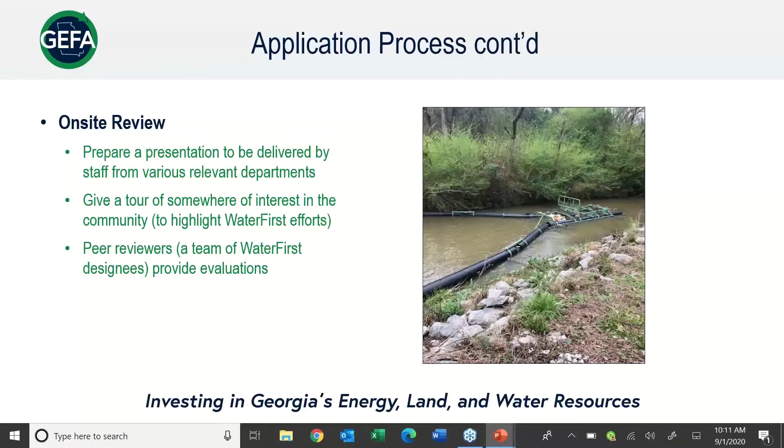The first is the watershed assessment. Then you have water conservation, water reclamation and reuse, stormwater master planning, water supply protection, education outreach, wastewater treatment and management, water supply planning, and regional water planning.

All of these criteria are actually on the checklist, as Ansley stated previously, and they're broken down so that each community, when going through their checklist, can determine what areas they are proficient in and write down any information they need to add that would be beneficial for the reviewers, so they can see exactly what the community is doing within these 9 components of WaterFirst.

So this is something that, when we get an opportunity to review, gives us the chance to see what the communities are doing with WaterFirst.

This is one of the big aspects of WaterFirst: the incentives for why communities want to be WaterFirst. The first incentive is a 1% interest reduction for GEFA water-related loans. So anytime you are designated as a WaterFirst community, when you apply for a loan from GEFA, you get a 1% interest rate reduction, which is a huge cost saving for the community.

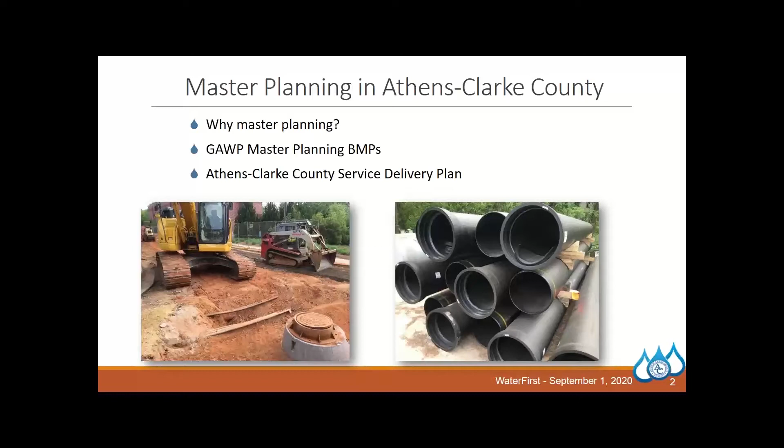My goal is to provide some useful tips that you can try out. I'm going to talk about the reasons a utility might want to do a master plan, and I'll share some helpful resources. I'll use our plan in Athens to highlight the things that I think are important. And of course, I'd be remiss if I didn't tell you a little bit about my utility.

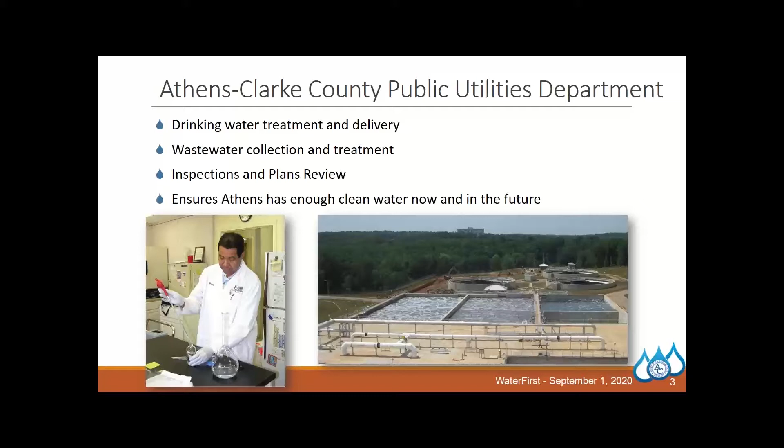We treat and deliver about 15 million gallons of water every day to about 125,000 people, and we collect and treat about 10 million gallons of wastewater every day. We serve all industrial and commercial customers and about 75% of our residents. We review plans and inspect all water and wastewater projects, and we conduct thousands of water quality tests every year to make sure that Athens has enough water now and into the future.

Before I dive into our planning process, let's take a quick poll. What is your level of understanding of master planning? Are you completely green, have some basic knowledge, some solid background, or are you an expert?

I can't see the poll results, so Ansley, you're going to have to tell me what the answers are. So far we still have some answers coming in, but we have about 40% saying they have some basic knowledge, about 29% are completely green, 29% have solid background, and 0% have claimed to be an expert. Well, I can't claim to be an expert either, I'm just good at some bits of it. And just to remind the audience, you're actually clicking the right button for the response on the poll.

All right, well good, we have people with some basic knowledge, some solid background, and some newbies. I think my presentation will probably have benefits to everybody.

I sure hope so. But there are a lot of reasons to do master planning. Maybe you started an asset management program to improve facility operations and some big capital needs were identified. Or maybe you've started to notice increasing problems with sewer overflows and water main breaks. Operational challenges like this can be a signal that you need to engage in master planning.

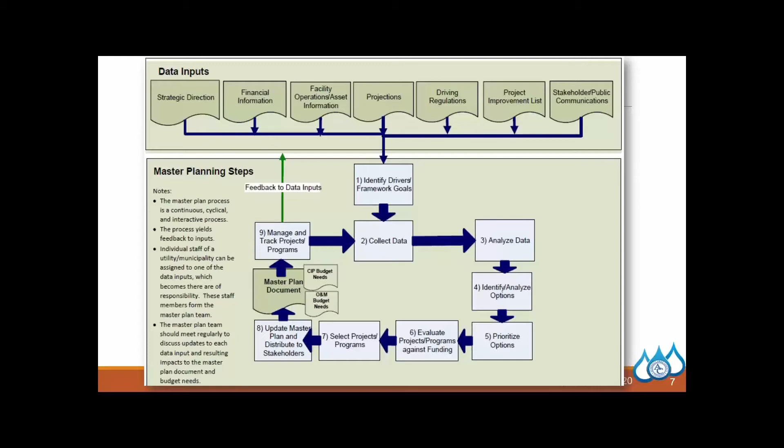So this is a page from those guidelines. You see the data inputs at the top and how they feed into the master planning process. Our process in Athens is very similar to this, but this one looks very complicated. So we simplified ours to just the major points, and we used our simplified diagram to help us explain our master planning process to our customers, elected officials, manager, and really anybody else who's interested.

It has been an extremely valuable tool in getting our work done. It's a 20-year plan that's updated every 5 years, and every 5 years when the mayor and commission accept the plan, they also accept 6 years of rate changes that support the plan. Although every year along with the budget they have to approve these rate changes, so they approve them annually, there are no surprises and they tend to go pretty smoothly.

Our broad overall process is pretty simple. In every update, we review our goals and objectives for water and wastewater service. In the infrastructure element, we assess the existing water and wastewater system and identify a list of projects to help us reach our goals. Then in the capital improvements element, we prioritize the projects, and in the financial element, that's when we actually schedule them over the next 20 years.

I'm going to focus on performance measures for a moment. We use them for so many things, I think it's important to highlight them. They provide us with the detailed goals for each of our services.

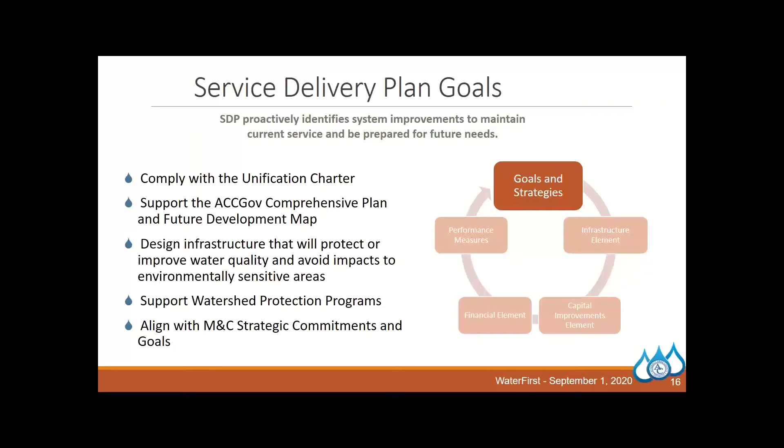For example, we did an economic analysis of water supply shortages, and that helped demonstrate the need for additional long-term water supplies and demand management programs.

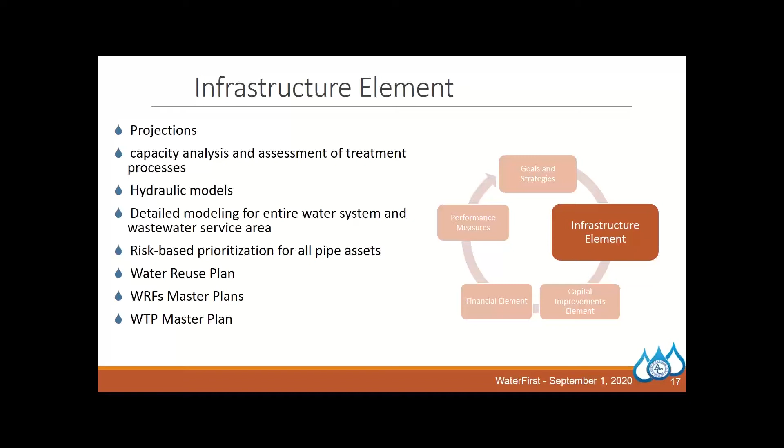Chris is going to talk in more detail about projections, so I'm not going to go into details of how we do our projections, but I would like to share how collaborating with other departments can really help. Maintaining relationships with other organizations within your government or other organizations can really help.

A really good example for us is how the planning department helped us develop population projections and place them into individual watersheds. They did this for us for the first time as part of the 2015 update, and they continue to help us now. It's a great example of how important it is to maintain communications with the planning department and various departments.

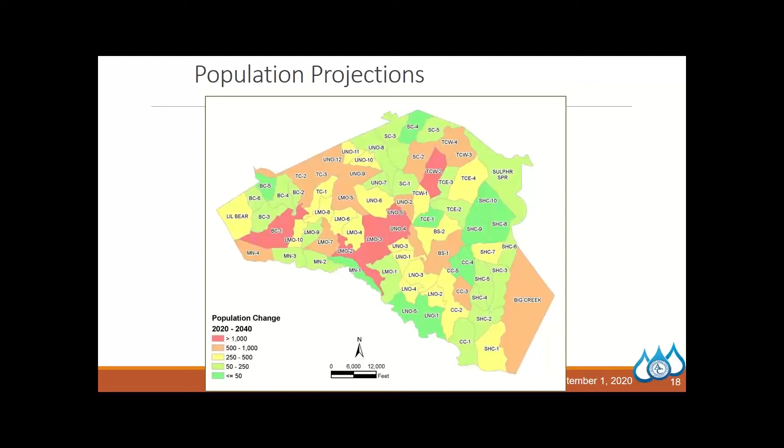And what they do is they let us know about changes in population projections, land use, major industries that could affect water shortages, that could affect water usage more than we know. Once we have the projections at the watershed level, we can translate them into water and wastewater demand growth areas. Working with the planning department helps us make sure our projections are consistent with other public efforts.

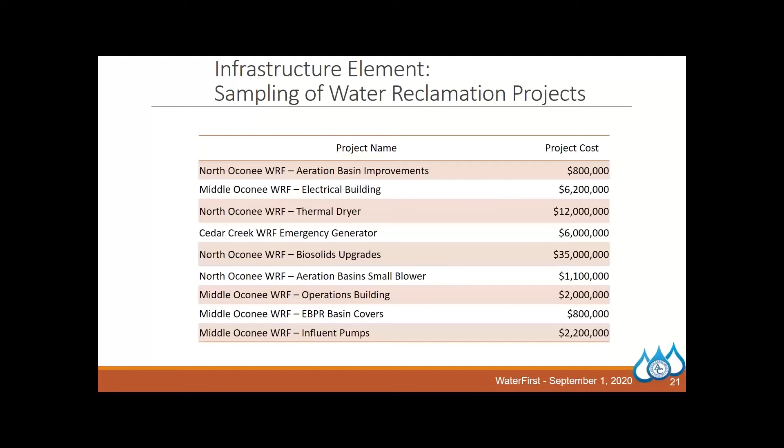The next step is to prioritize all of the projects that were identified in the infrastructure element. We do that in what we call our capital improvements element. The infrastructure element identified 59 projects totaling $400 million. These projects will be scheduled using a 20-year fiscal pro forma later this year, but first we prioritize them in the capital improvements element.

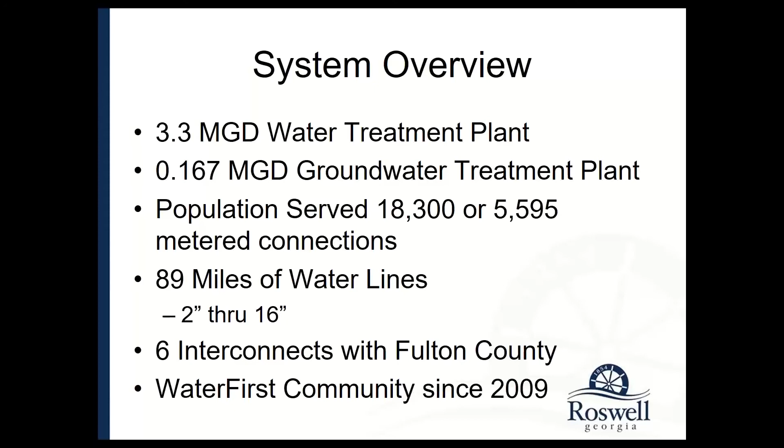In 2009 is when we applied to be a WaterFirst community, and were brought in, and we've been a WaterFirst community ever since.

As I said, in 2015, we began construction on the new treatment plant. One of the things we wanted to have is a little bit more drought resiliency. So as part of the new plant, we built a 10 million gallon raw water storage tank, which gives us about 3 to 5 days worth of water before we have to start buying water from the county, and hopefully in that time the stream flows will increase enough to where we can start producing to meet the demand.

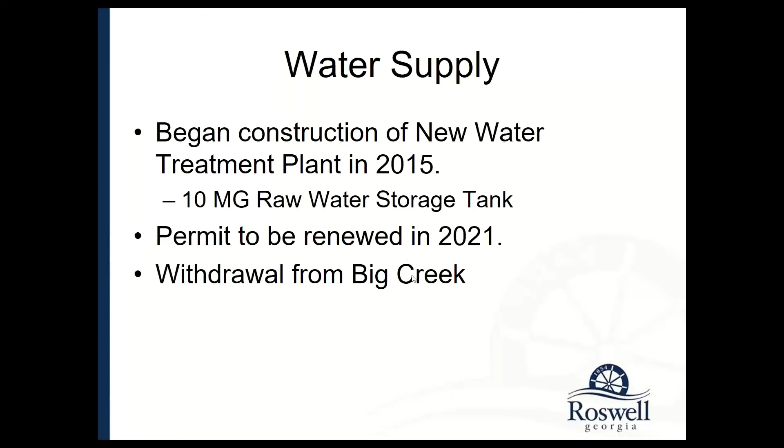Our permit is due to be renewed in 2021, so of course we're working on updating the master plan for 2021 to submit to EPD, as well as get approved by our mayor and council first. And our surface water withdrawal comes from Big Creek.

So this is just kind of a schematic of the system where we're able to withdraw from Big Creek, goes to our raw water pump station, up to the 10 million gallon storage tank, and then is gravity fed down to our water treatment plant.

And from there, the treatment plant sends it out to the distribution system, in which case we have 3 water tanks in the system, storage capacity of 1.075 million gallons.

And then we have our well site that we try to operate weekly. Right now it's been down due to lightning hitting the SCADA communication stuff, so we're getting that fixed.

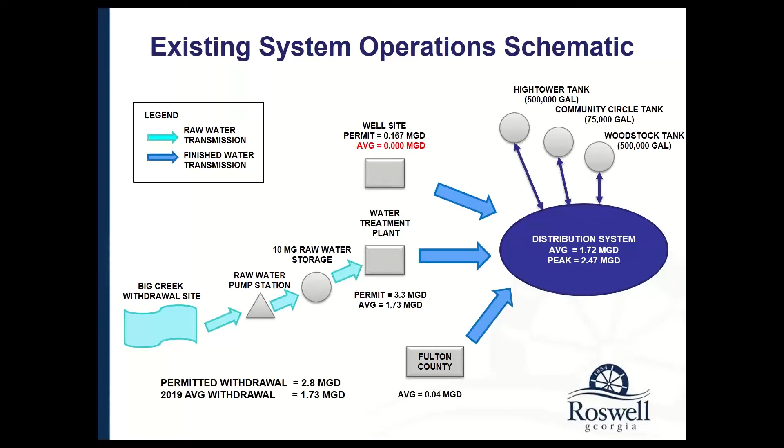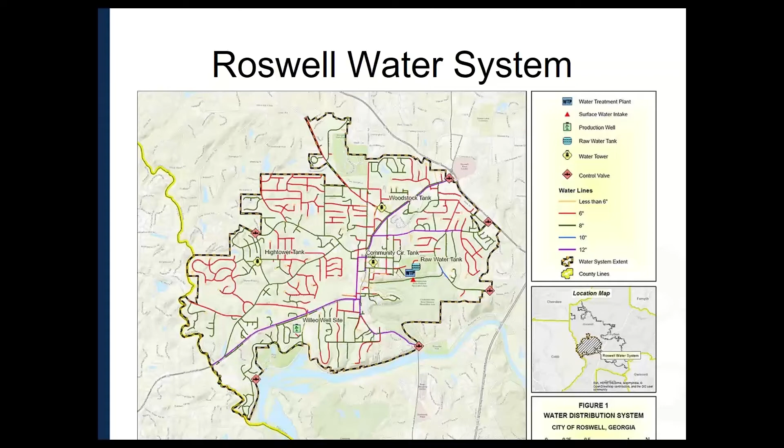And this is just kind of an overall area of what we actually serve in Roswell, which is mainly the southwest quadrant of the city of Roswell, mainly the historic district.

One other item, when we launched our AMI system in 2011, we were able to give early notifications to our customers on when they had constant consumption or possible leaks. I never call it a leak, it's always constant consumption.

And this leads us into our poll question: how often do you review your master plans?

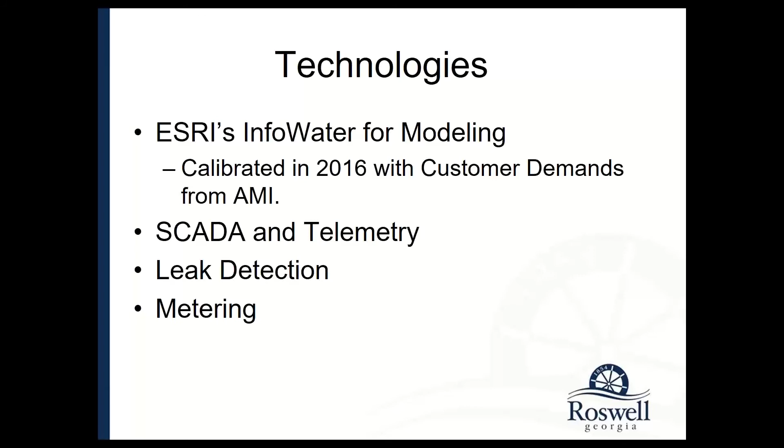Annually, we budget about $400,000 a year for line replacements, which is a little bit around 1.5% of our overall budget - really close to that, which is what AWWA recommends. And if we can do more in a given year, that's great. That's why you need to look at your financial sustainability - how much water line replacement can you do in a year?

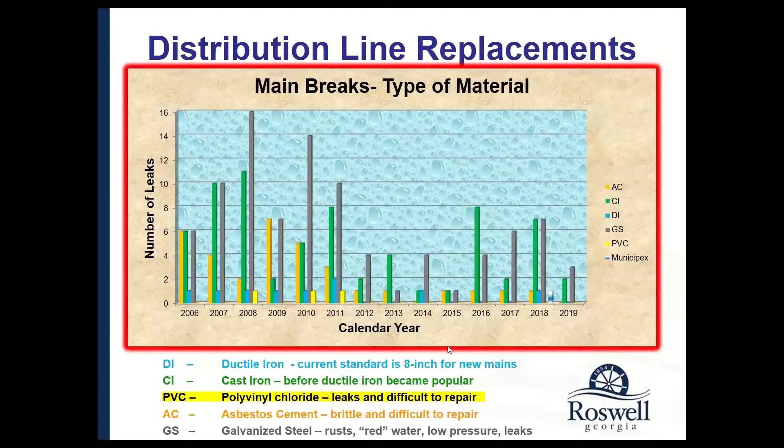This just kind of shows all the different main breaks that we've had by material type. Cast iron and galvanized steel have been kind of my nemesis, and we've been replacing a lot of our galvanized steel with Municipex pipe. Many of them are in the cul-de-sac loops, and we've been able to reduce those number of breaks significantly over the years.

So next poll question: how do you update your master plan?

So the answers are coming in. Still got some more time if others want to submit. All right, looks like everyone has submitted who are going to submit.

So it's broken down 50-50 down the line, 50% internally by staff and 50% hiring an outside consultant. So Roswell, for their 2016 master plan update, we did it internally, and that was a lot of fun. In the past, we've had consultants do it for us, which can be quite costly, but doing it internally gave us a great way to really look in depth at what we wanted to do and how we wanted to go about achieving it.

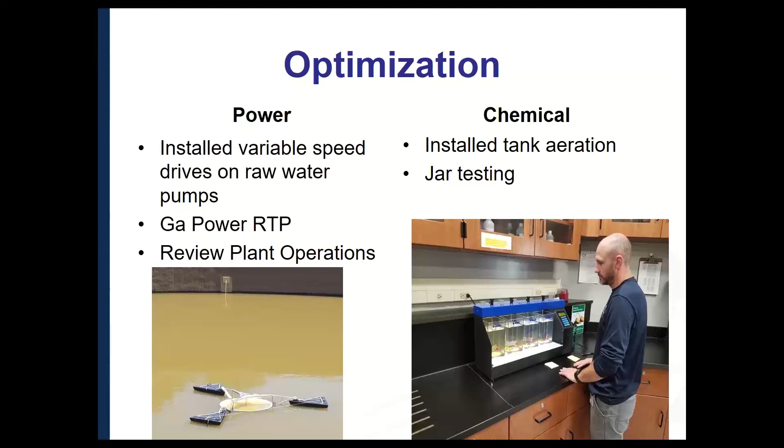For chemical optimization, we've actually cut our chemical costs down by about 40%. A large part of our chemical cost was in permanganate, and we found through jar testing that we were overfeeding our permanganate for pre-treatment in the raw water tank. So we've been able to cut that cost significantly, and those cost savings can go towards operations or future capital needs as we move down the road.